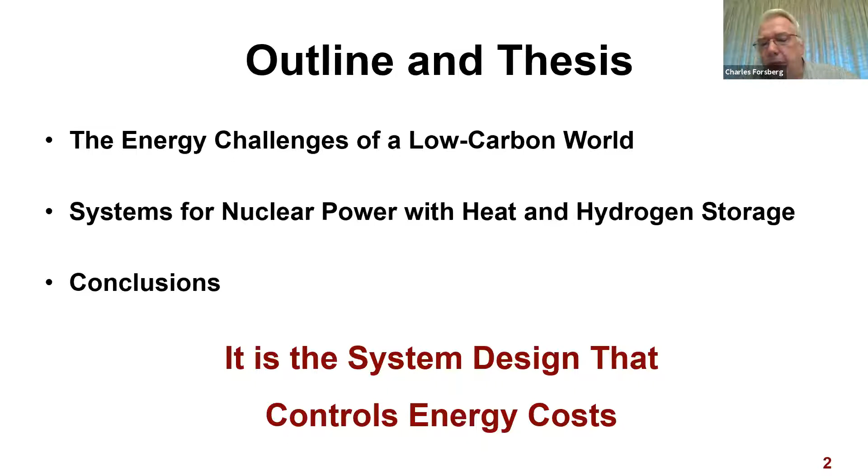Today I would like to discuss baseload nuclear systems for variable electricity and hydrogen with heat storage. It's part of a series of activities at MIT on how to develop a system approach to a low carbon system. The outline is that I will cover energy challenges of a low carbon world, then describe systems for nuclear power and heat and hydrogen storage, followed by conclusions. But the important thesis of the entire talk is this: it is the system's design that controls energy costs, not the specific details of any particular technology.

Let's first take a look at energy challenges of a low carbon world. The first challenge is that the low carbon world has very different economics than today's fossil systems. If we look at a fossil system, a combined cycle natural gas plant, it has low capital cost and high operating cost. Those characteristics enable economic operation at part load. If we look at a nuclear, solar, or wind system, these have high capital cost and low operating cost. It is uneconomic to operate these at part load. If you operate at half load, you approximately double energy costs. So the question is how to economically match production with demand.

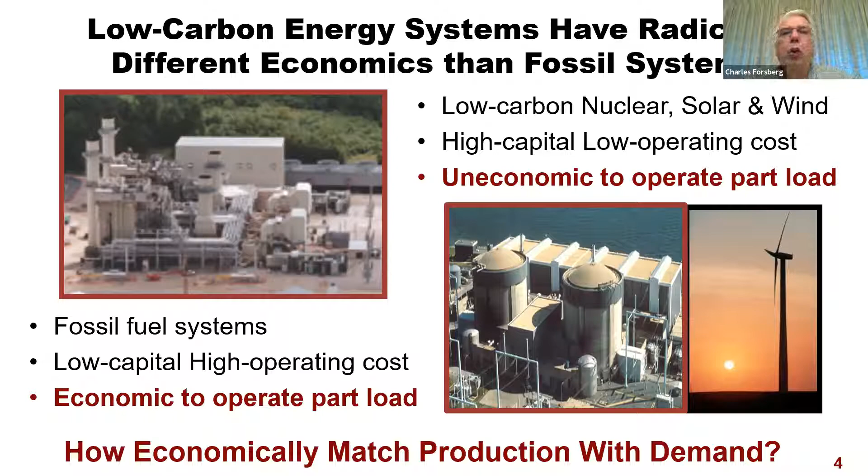Let us start with a second observation: there is a mismatch between electricity production and demand, using the California case. In the figure, the dark black line is the smooth daily California electricity load. The dotted line shows the smooth daily renewable output for wind and solar, adjusted to produce the total amount of electricity needed in California over a year. What we find is there's a mismatch: in the summer, there's a surplus; in the winter, there is a shortage. So there's a seasonal problem that we must address. Now, if one had an all-nuclear system, the match between production and demand would be better, but there would still be a serious mismatch on a seasonal basis.

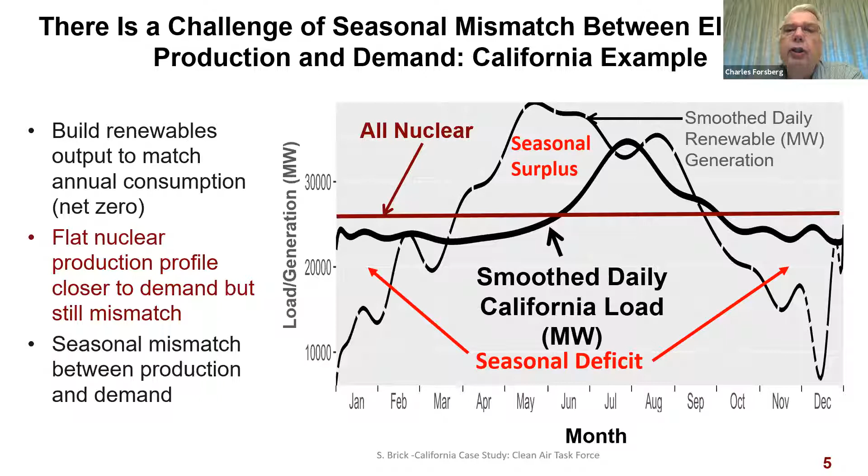Now let us take a look at what the customer needs. Most energy consumed in the United States is consumed as heat. Electricity is only 17.5% of consumer energy demand. This figure shows on the left various energy sources: nuclear, geothermal, fossil heat from natural gas and coal, biomass, and fossil heat in the form of oil. On the right, we find what the customer requires: residential, commercial, industrial, and transportation. In the middle is the electricity sector, where we convert various energy inputs into electricity. What is most striking is that almost all the energy used by society is used in the form of heat. For example, in the industrial sector, the electrical input is insignificant relative to the heat input. Indeed, the electrical output of the entire United States is only equal to about half the heat input into the industrial sector.

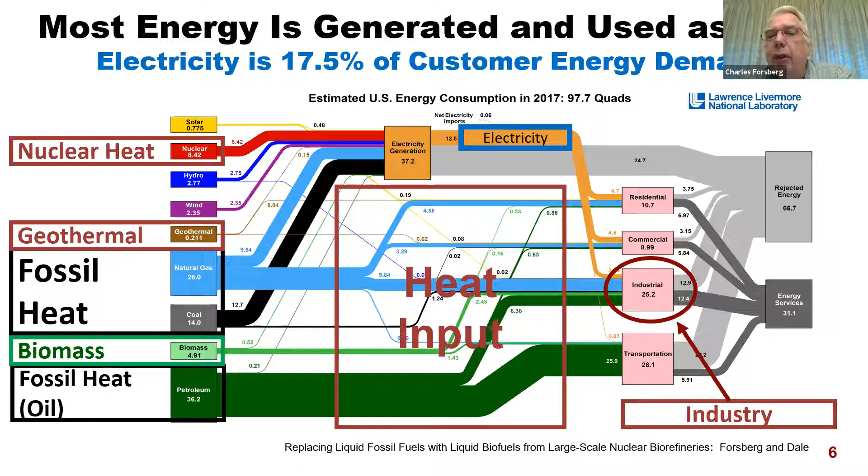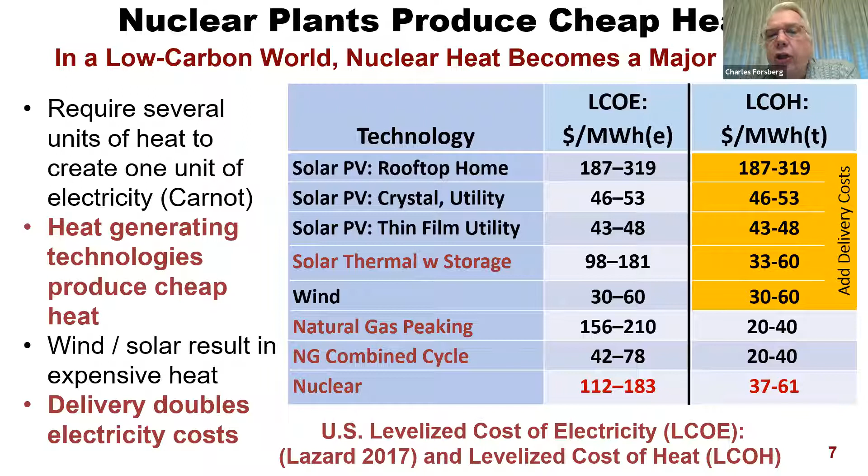Now, in a low carbon world, nuclear is the low cost energy source. We show here various technologies with the levelized cost of electricity and the levelized cost of heat, for PV, wind, natural gas, and nuclear. The levelized cost of electricity for most electrical technologies and the levelized cost of heat for most applications is the same, because in most applications, particularly where you need higher temperatures, you use resistance heating, and one unit of electricity equals one unit of heat. However, in the nuclear case, it takes three units of heat to produce one unit of electricity. As a consequence, nuclear reactors produce cheap heat but more expensive electricity. The other feature of our electrical system is that roughly half the cost of electricity is the cost of delivering that electricity. So if electricity is used for heat, it implies high heating costs. In short, electrically generating technologies like wind and solar produce cheaper electricity, while heat generating technologies such as nuclear produce lower cost heat.

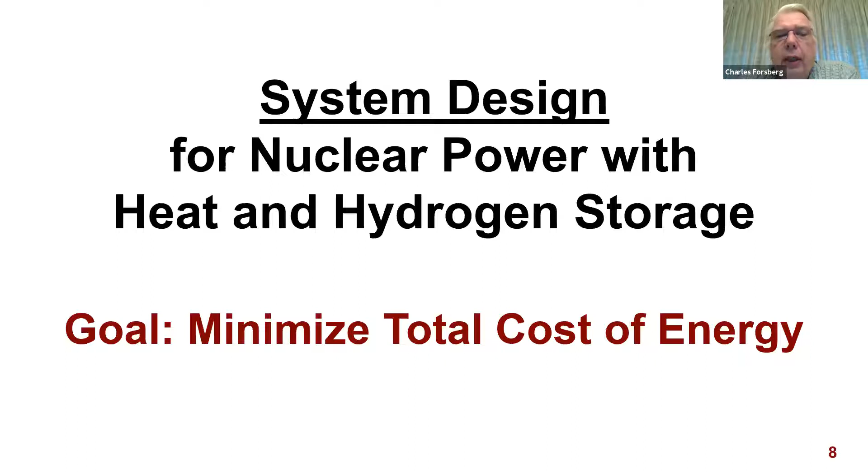With that, let us turn to the system design for nuclear power with heat and hydrogen storage. Remember our goal: minimize the total cost of energy. We show here a low carbon systems diagram that includes heat and hydrogen storage. I'm going to go through this figure component by component in the next 10 slides. In the middle of the slide, in the red boxes, is the heat generating sector. We have the nuclear reactor, heat storage, and the option of a combustion heater as a secondary heat generation source.

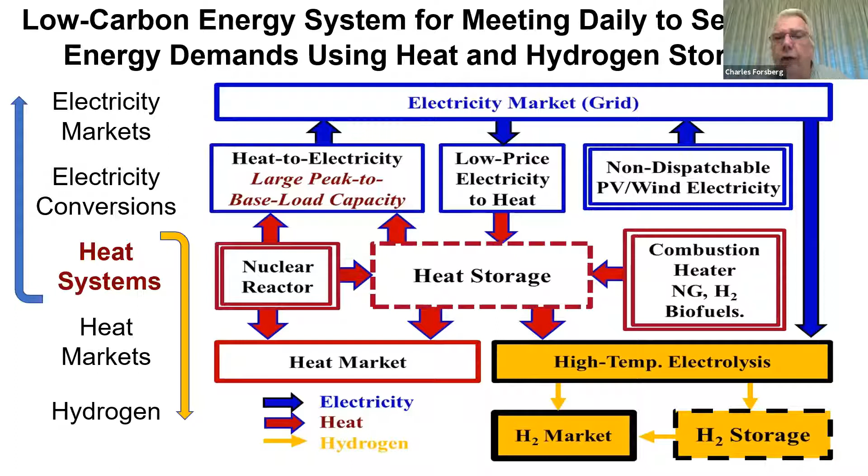Going upwards from the heat sector in red, we go to the electrical sector, where we have energy conversion systems, heat to electricity, such as a steam turbine, converting electricity back to heat, and of course, wind and solar that produce electricity, yielding in all cases electricity to the electric market. Taking a look at the heat systems sector in the middle and going downwards, we go to the hydrogen economy. Going downwards, we have heat markets, that is the industrial heat market, and the heat market that goes into high temperature electrolysis that produces hydrogen. So with this division of a sector going from heat to electricity and a second sector going from heat to hydrogen, let us look at the individual sector components.

Our first component is the system designed for nuclear power with heat storage.

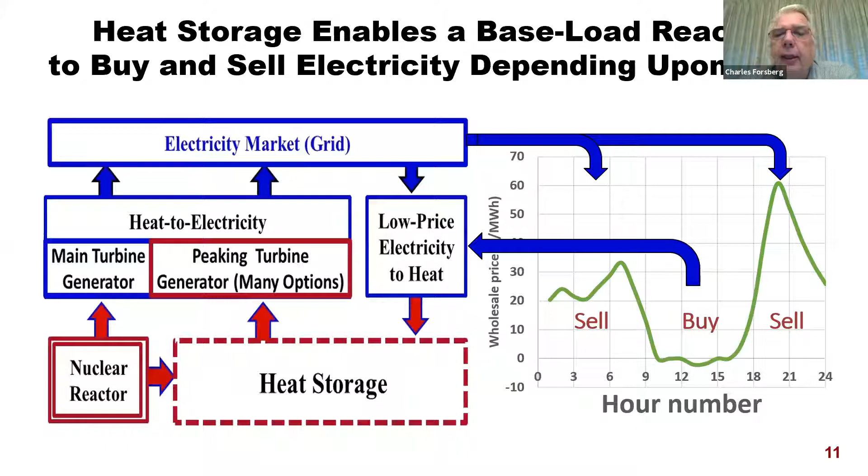At times of very low electric prices, near zero, our system buys electricity, and the electricity is converted to heat that goes into heat storage. At the same time, the nuclear reactor's heat goes to heat storage. What this system does is it adds electricity when the grid needs it, it subtracts electricity when the grid does not, and in effect, it will set a minimum price of electricity that helps both the nuclear sector and the solar and wind sectors.

Now, it turns out that heat storage is relatively cheap, and there are many, many options. The DOE heat storage goal is $15 a kilowatt hour, but new technologies may reduce this to $2 to $4 a kilowatt hour. The electric battery storage goal is $150 a kilowatt hour, and you double that if you include electronics. And the difference is the raw material costs.

On the table at the right, we show different storage technologies that could be used with light water reactors or more advanced sodium, salt, and helium-cooled reactors. And we take a look at what is behind these individual storage technologies. We have geothermal, which of course is storing heat underground, crushed rock, oil, cast iron, nitrate salt, and chloride salt.

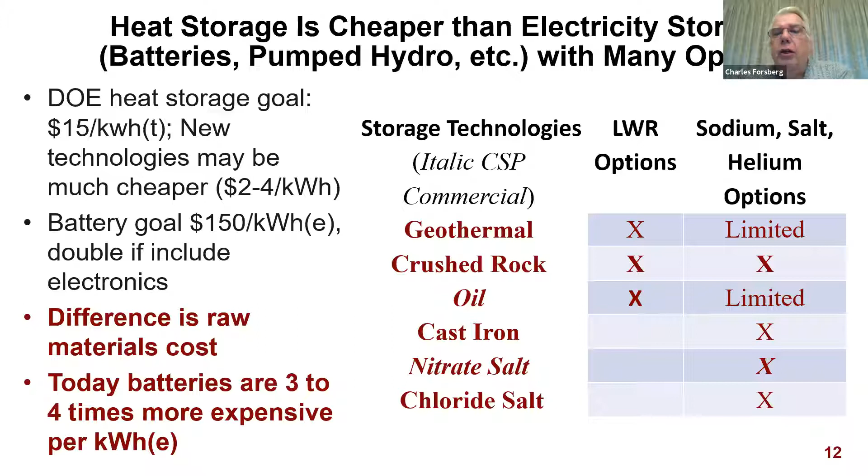What is noteworthy about all of these storage options is their costs are very low relative to the components that would be used in any electrical storage system. Now today, batteries are 3 to 4 times more expensive per kilowatt hour than heat storage. In the future, that difference may be larger.

The second generation heat storage systems use crushed rock in oil or salt in the tanks. The reason why, of course, is crushed rock is less expensive than oil. Third generation systems look at using crushed rock as a heat storage component, and the oil or salt is sprayed on the crushed rock and used to move heat from the reactor to heat storage to the turbo generator, but is not part of the storage system. It's only a heat transfer fluid that is used to move heat from point A to point B.

The noteworthy feature of Generation 3 heat storage is it may drive capital costs down by a factor of 10, to perhaps $2 to $3 per kilowatt hour of storage. Extraordinarily cheap storage relative to any other systems.

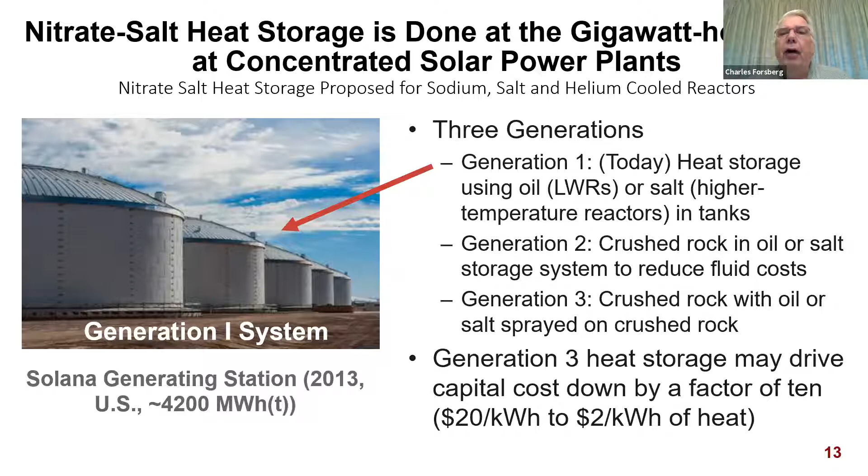Let us now look at nuclear power with hydrogen production and storage. There are 2 components that we must remember about hydrogen. First, there's potentially a very large hydrogen market. The US market is currently 10 million tons per year. There are several future hydrogen markets that are almost assured in a low carbon economy.

The first is replacing fossil fuels as chemical reducing agents to produce iron. In most cases, there are no other options; you need a chemical reducing agent. The second is for high temperature furnaces where one needs very high temperatures, and hydrogen burning can provide those very high temperatures.

There are also 2 potential mega markets, much less certain because they have other competitors: transportation and the replacement of natural gas.

The second feature about hydrogen is that bulk storage is extremely cheap, as has been demonstrated for the last 40 years in various parts of the United States. Hydrogen can be stored underground in a variety of different geologies. We show here a picture of hydrogen storage in salt caverns in Texas. You can see the surface facility on the left and a schematic of what those underground caverns look like at the right.

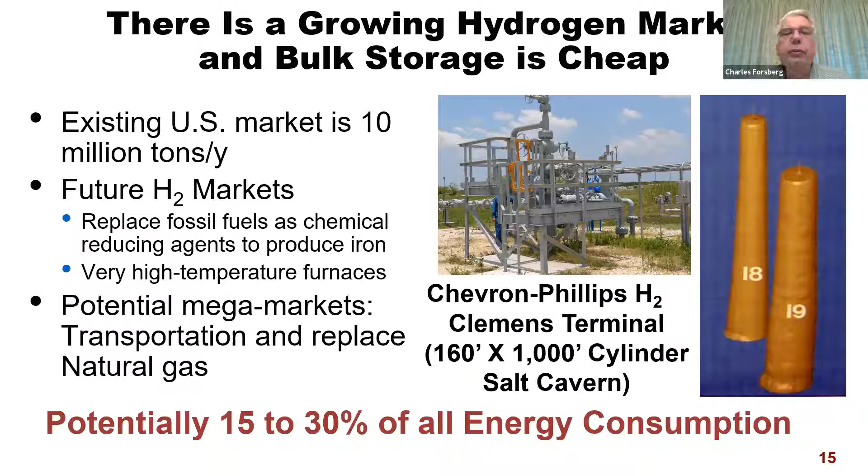Now, depending upon which scenario you believe in or which hydrogen future you think might happen, potentially 15 to 30% of all energy consumption could be in the form of hydrogen for a wide variety of applications. Now, there's one catch: all hydrogen production methods are capital intensive.

We have electrolysis, which is electricity plus water. We have high temperature electrolysis, which is likely the low cost option. This is steam electrolysis, so part of the energy input is low cost heat. More importantly, it has higher energy to hydrogen efficiency than other processes—in other words, the total amount of energy needed to get a kilogram of hydrogen is less for a variety of technical reasons. There are thermochemical processes, which are heat plus water, and of course, steam methane reforming of natural gas, the current production technology, plus additional carbon dioxide sequestration.

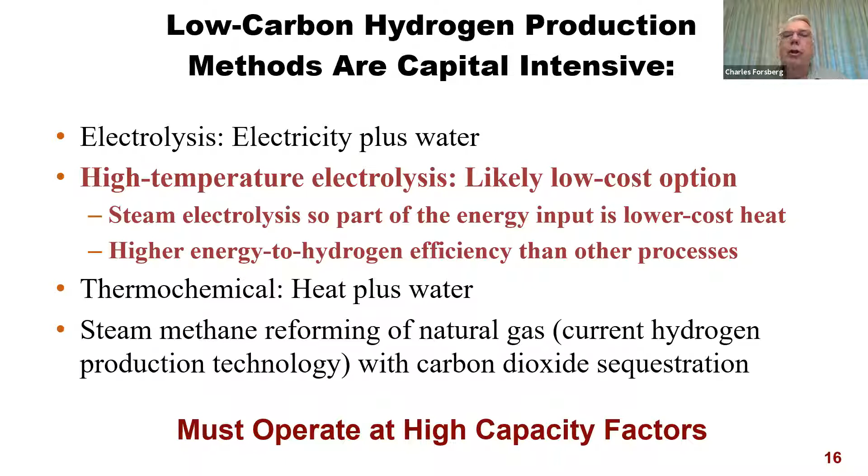The key feature of all of these technologies, however, is that you have to operate them at high capacity factors because the capital costs of these plants are very high. You can't afford a hydrogen future with hydrogen plants operating at low capacity factors.

Now let us take a look at high temperature electrolysis using heat and electricity. Here we show the top part of the system, which is the system we described earlier, and the bottom part is the hydrogen system. We have high temperature electrolysis, which needs electricity from the electricity market or nuclear reactors, and it needs heat that can come from the nuclear reactor or the heat storage system. The hydrogen can go either into storage or directly to the hydrogen markets.

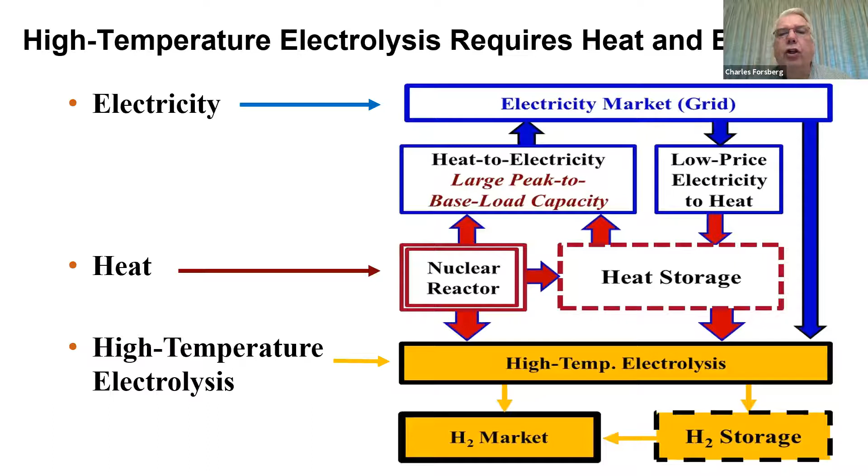So again, in the middle of the diagram we have the heat technology. Going upwards, we have the electricity technology. Going downwards, we have the hydrogen technology. Now, when electricity prices are high, reactor heat and stored heat from the heat storage system are used to produce electricity. There is no hydrogen production.

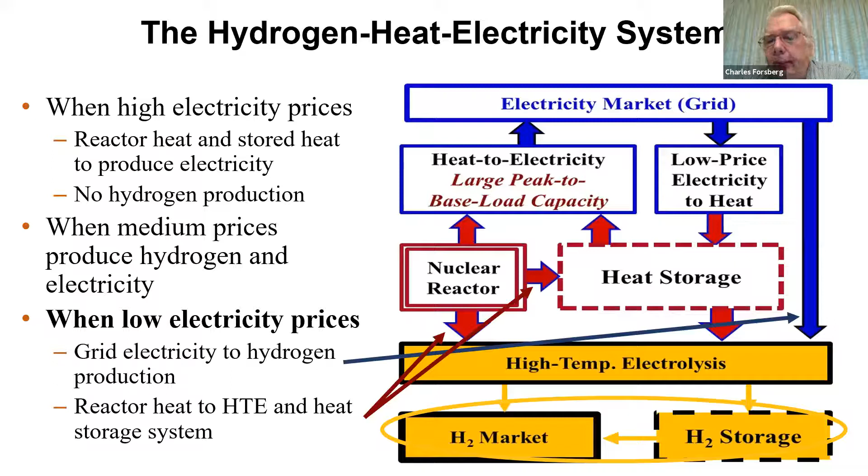At medium prices, we produce hydrogen and electricity, some mixture of the two. When we have low electricity prices, we buy electricity from the grid for hydrogen production, and all of the reactor heat goes to the high temperature electrolysis unit or the heat storage system. In effect, this becomes a massive sink for excess electricity on the grid.

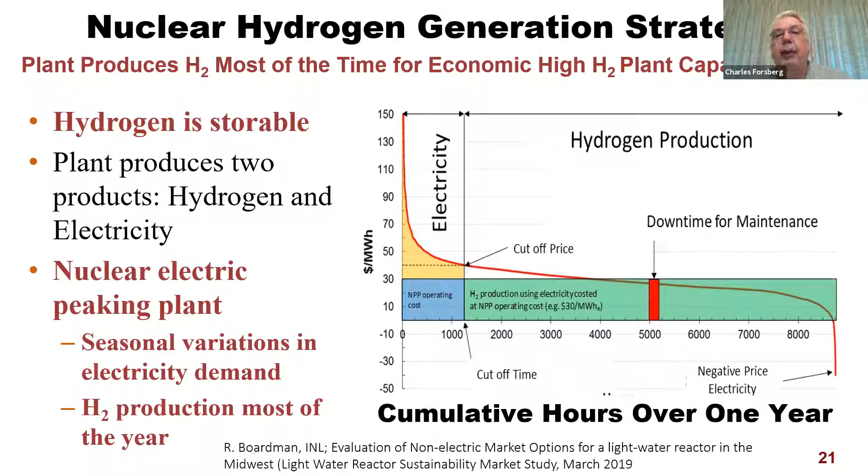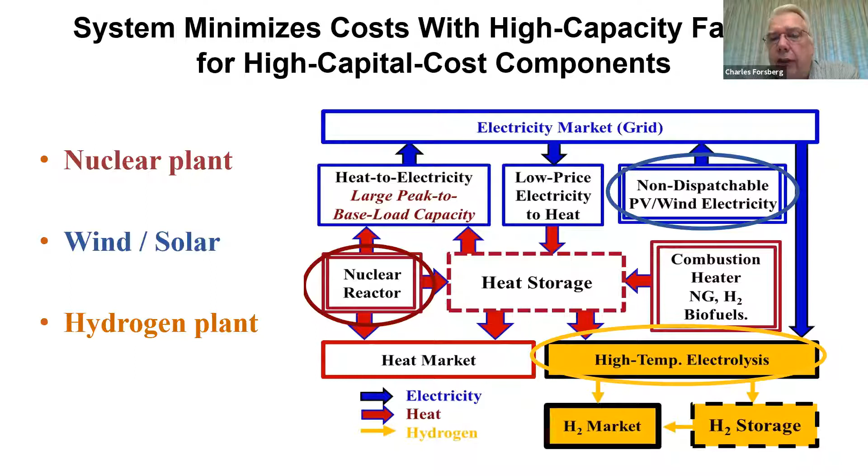Where does this leave us? It leaves us with several conclusions. First, this system allows the high capital cost components—the nuclear plant, the wind and solar plants, and the hydrogen plants—to all run at very high capacity factors to minimize cost. Second, the economics is made possible by two factors: low cost heat storage coupled to the nuclear reactor, and low cost hydrogen storage. This is the storage in the system that matches production with demand.

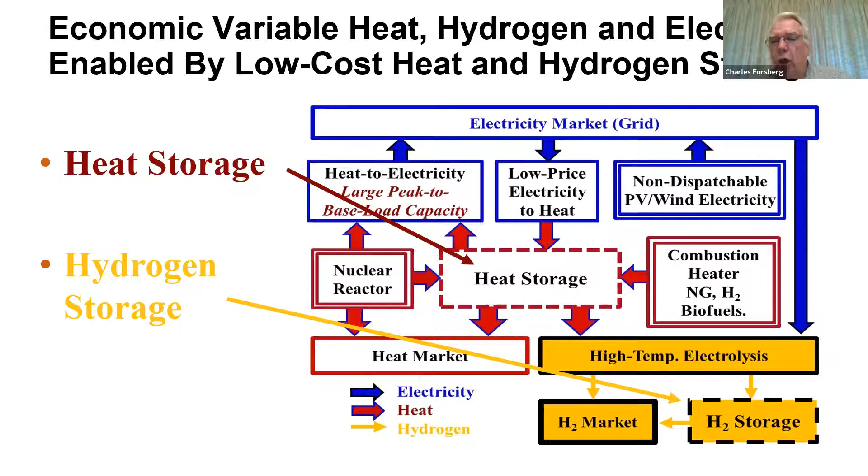With that, I will end this discussion. Look forward to any questions you may have.